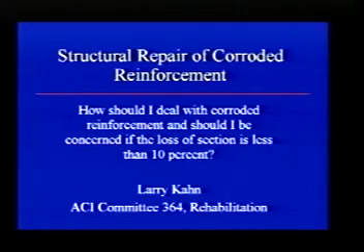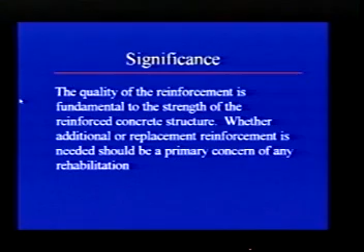On structural repair of corroded reinforcement, this came to Committee 364 as the question: how should I deal with corroded reinforcement, and should I be concerned if the loss of section is less than 10%? Ron Heffern and I were assigned this FAQ, and we started investigating. The significance is obvious: the quality of reinforcement is fundamental to the strength of reinforced concrete structures. Whether additional or replacement reinforcement is needed is always a primary concern in rehabilitation, because flexural strength is directly dependent upon the area of reinforcement, and the same with shear strength.

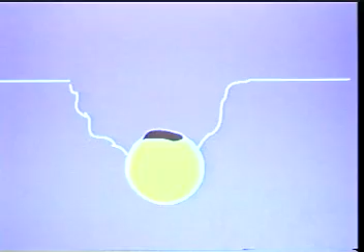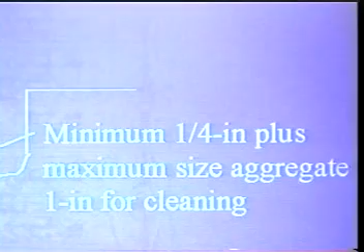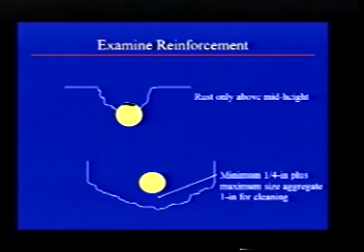We have some of the concrete removed to see how well the bar is bonded, chip hammering out material down to very solid concrete. Sometimes we only see rust above mid-height, so you may not need to chip down lower than that. But with weakened concrete or rust surrounding the reinforcing bar, you have to chip all the way around, and below the bottom of the steel, a minimum of 1/4 inch plus the maximum aggregate size—generally I recommend 1 inch, which is what our committee is coming up with—to get enough room to inspect and clean the bar thoroughly all the way around.

Then you have to measure the reinforcement, and this isn't easy. I suggest wire brushing; you can also sandblast or shot blast, using appropriate environmental concerns, or water blast in an exterior environment to get to a bright surface. In cleaning the bars, I generally don't recommend solvents, because solvents can act as a grease and prevent new surrounding materials from bonding well with the existing concrete. So solvents are generally not a good idea.

If the bars are epoxy coated, you should expose a broad area around where you see the rust products, because it can be rusting underneath places where you have the epoxy coating. Then you have to measure it—I suggest measuring the smallest sections with calipers in all directions so you can get an average diameter.

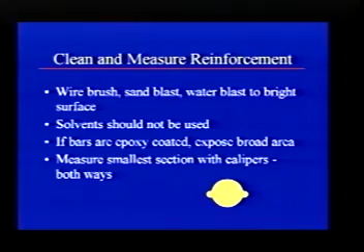In researching this, there's not a standard for reinforcing bar area, only a standard for size. If you say you have a number 9 bar, now called a number 29 bar, it has 1.0 square inches of steel. But even if you read ASTM A615 and others, you can have different size deformations, different deformation patterns, and different amounts of steel in the rib compared to the body of the bar, as long as there's 1 square inch total. So finding the actual area is difficult—even finding it within 10% is difficult. Don't be surprised if there's trouble finding areas. So we're suggesting taking the easiest, smallest measurement to get a conservative estimate of how much steel is left.

Then, the consequence of a 10% loss: say you measure the bar and find only 90% or 80% of it remaining from your computations. The first and nicest thing to do is take measurements of the entire structure, because you're evaluating for rehabilitation. In the standard building code, ACI 318, chapter 20 for existing structures, if you know the dimensions of the section, have a good idea of the concrete strength by test, and know the yield stress of the reinforcement, then the flexural capacity reduction factor phi can be taken as 1, which automatically gives you the 10% increase in strength you may need based on your computations. So that's the easiest way to show that 10% loss isn't going to matter.

You can also consider moment redistribution. For flexural design, if your reinforcement is corroded in the negative moment regions, whether in columns or flexural members, you can redistribute that negative moment to positive moment areas that may not be corroded, up to about 20%. This depends upon the ductility of the section, your reinforcement ratio compared to the balanced reinforcement ratio, and similar factors.

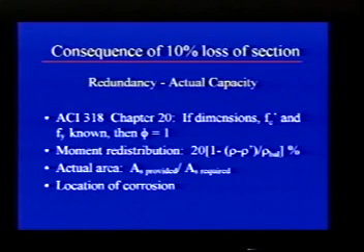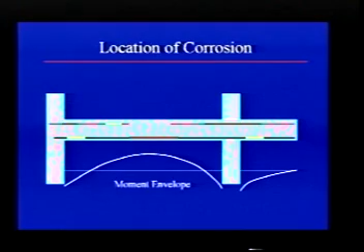But I think the most important thing I've seen in my investigations has been the location of the corroded reinforcement. If we take a look at the horizontal frame members in a frame, flexural steel, and we have some kind of moment envelope from our anticipated loads, the red zones are where I say we should be really concerned, and the yellow zones are probably where we're not concerned. As an example, on the left-hand side, the top negative moment reinforcement where we have the highest moments, that's where you really do need to be concerned about measurements.

On the other hand, if you take that same bar and go out into the positive moment region where all you've done is have development of that negative moment reinforcement, but you have the same area, you could have a very substantial loss of reinforcement that you don't need to add any bars to, because we only need the actual area of steel to resist the forces in the bar. That bar could theoretically be tapered down to zero in order to have it developed within the section. So if it's at a section where we truly don't need it, you don't need the bar - you can do with a very much reduced section.

Same with positive moment reinforcement in the bottom, in the negative moment region. Some steel needs to be there for continuity reinforcement per section 7.13, but if it's not needed for such continuity reinforcement, again you don't need to be concerned about its replacement.

Shear reinforcement is the same thing. Generally in high shear regions, the designer has only put in enough shear reinforcement that's needed, and you may have to add some replacement.

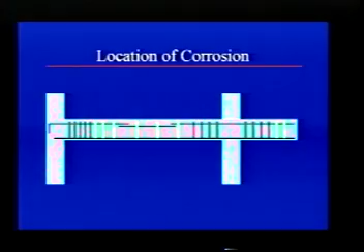On the other hand, I've seen some vertical steel continue throughout the cross-section where it is not needed in the middle part of a flexural member. It may not be needed - one has to actually look at the shear envelopes. But where the vertical steel has been placed in order to hold up the horizontal reinforcement, that is, it's been a chair, the horizontal reinforcement already being there is held up by the remaining concrete. Those vertical steel bars are no longer needed, so again that may not be of a concern.

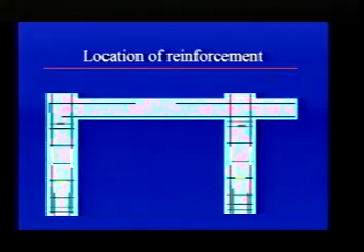Columns are the same way - you have to look at the moment-axial load envelopes. Typically the axial load can be handled by the strength of the concrete that's there. In many columns, the concrete strength is much higher than required, so the steel is much less responsible for axial load, but it is still dramatically needed for lateral load or flexural capacities. So in your analysis, you just have to determine how much flexural capacity the column actually needs. In effect, you're getting around a lot of corrosion problems by doing the detailed analysis of the structure.

In seismic considerations, which now through the International Building Code, even folks like me in Georgia are highly concerned about, because in the last 2 months our seismic requirements have increased dramatically. But in FEMA and NEHRP guidelines, where you can look at a remaining lifetime of a structure, you can use lower seismic criteria if you designate a shorter lifetime for the facility. So the same thing for replacing reinforcing steel - you can also look at the extended lifetime of the structure, in order to see what your seismic design criteria has to be.

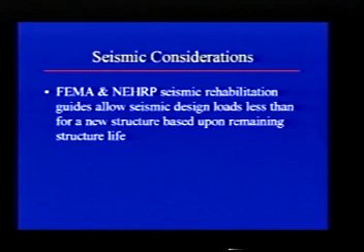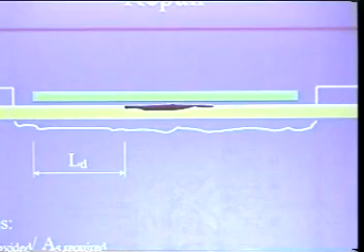Finally, in repair, if we've chipped out concrete - the yellow bar with black shows some corrosion products, and the green is some kind of replacement steel - one of the easiest things to do is chip out really good concrete so you have enough development length to lap splice the bars for development. Remembering that the only steel you need to add is to get back to existing capacity, and therefore the development length is for the shorter or smaller diameter reinforcing steel, not the development length for the large bars that were originally there.

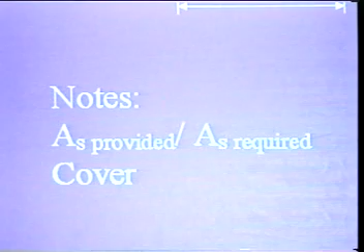You also have to consider cover requirements here. By putting the bar, like I showed, the green bar on top, you reduce the cover for that bar - that's not a good thing. You really want that green bar horizontal or at the same level as the yellow steel. That oftentimes means chipping out some good concrete so that you can place that bar.

Yes, you can weld reinforcing bars together. This gets controversial, but you can use the flare bevel weld according to the American Welding Society welding code for reinforcing bars, D1.4.

In doing that, some guidelines I've learned from reading D1.4 several times: this is where you need your chemist to help. The main thing you need to know is the carbon equivalent content of the reinforcing bars. You only need a small scraping of the good part of the bar for a chemist to tell you that.

If it's over around 0.75%, then you're in trouble. But most bars since World War II have a smaller carbon equivalent content than that, and therefore they are weldable, given you preheat up to around 300 degrees Fahrenheit.

Now, preheating reinforcing bars in reinforced concrete is difficult because the concrete is a fantastic heat sink and will sap a lot of heat away. But heating up to those low levels is certainly possible as long as the welder is experienced in welding, preheating rebars, and welding.

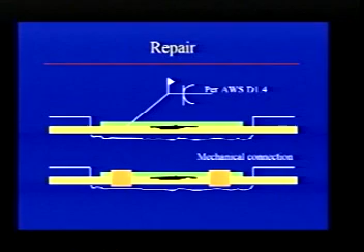On the other hand, reinforcing bars prior to the 1920s typically have such a high carbon equivalent content that they are not weldable. Where you really need chemistry analysis is for buildings built during the 1930s and early 1940s, where you often don't know the quality of iron or steel in the bars, and where welding can be really controversial.

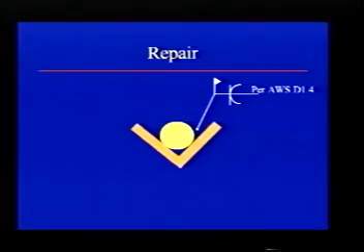Mechanical connectors are possible, although I have never seen them used for this kind of application. What I've done sometimes is use A36 steel angle iron, which is really easy to put in, with a flare bevel groove weld, using that angle iron rather than a lap splice reinforcing bar to make connections. So there's another possibility, and you can think of many more.

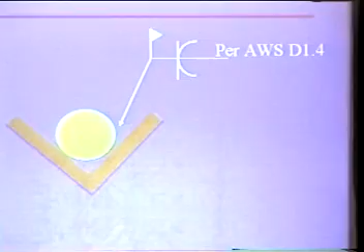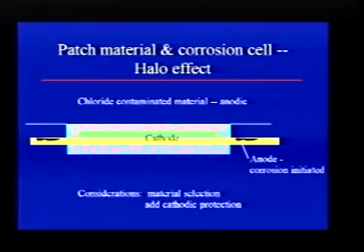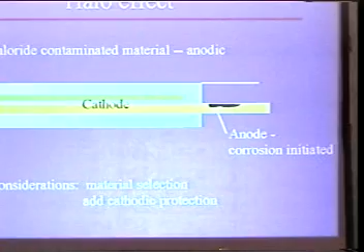We just heard about this halo effect. Certainly, looking at the patch material, once you have new reinforcing steel welded onto the old steel, and you place non-contaminated patch material, that repair becomes a cathode. The area just around the new patch becomes the anode, and you can initiate corrosion in that new anode.

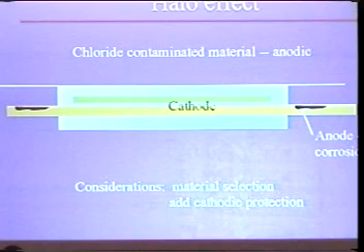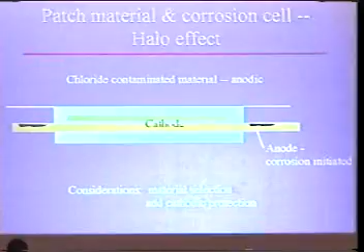For this, you need to read the rest of Committee 364 documents, 546, contact Alex Vaysburd and others, for what materials you should use, whether you should use some type of cathodic protection, or talk to other individuals about considering corrosion inhibitors, or whatever.

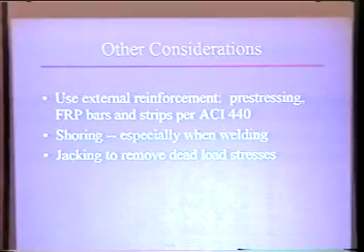But other considerations include the use of external reinforcing. That is, yes, you have rusted reinforcing bars, you put a patch in, but then you use external reinforcing. It could be pre-stressing, or fiber reinforced polymer bars or strips, as per some new documents from ACI Committee 440, that is FRP reinforcing.

Another consideration is shoring. If you have horizontal or vertical elements and you're welding those reinforcing bars, you really have to be concerned, because the yield stress of the reinforcing bar will be about half its capacity when the bar reaches 900 degrees Fahrenheit, and it will reach that when you're welding on it.

Therefore, your capacity of the structure can be dramatically reduced if you only have two reinforcing bars present and you're welding on one of them — you'd have much reduced capacity. If you have dozens of reinforcing bars and you're welding on one, you don't need shoring. So just be very concerned about shoring needs.

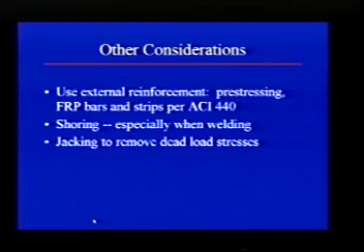The last issue, which could be the controversial one, is jacking to remove dead load stresses. Typically, in most repairs, I believe jacking is not necessary, because the ultimate strength capability of the structure relies on the yield capacity of the existing reinforcement plus the new reinforcement.

At ultimate, given that your structure has enough ductility—that is, your reinforcement ratio is significantly less than the balanced reinforcement ratio—it can deflect such that all the reinforcement will be yielding. On the other hand, if the structure is totally dominated by dead loads, serviceability may be enhanced if the dead load is removed, that is, the structure is jacked prior to adding new reinforcement.

So this is a real structural engineering concern: the relationship of dead load to total load stresses, and whether you need to jack or not. I think that's individual for each particular project.

I left time, so if this is controversial, y'all can ask lots of questions.

No, not controversial. Oh my goodness.

One of the problems an owner has is the question you just put up before us. Once you have the differential materials situation after the repair, what do you recommend? I'm asking you, that's what faces us as an engineer. I'm not going to go to a material supplier because I can't understand what they're saying. They give me all sorts of competing data. So what are you, as a consulting engineer, going to recommend to provide the most cost-beneficial repair in that situation?